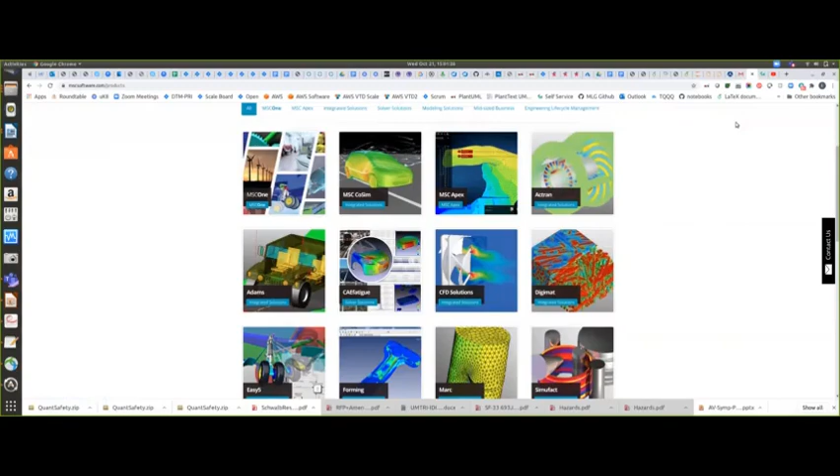The company is a simulation company. You can see here we have quite numerous products, different types of simulations, mechanical engineers and vehicle dynamics, and lots of different types of simulations. The one that I'm talking about here relates to this product. Let me show you the video of what our product is.

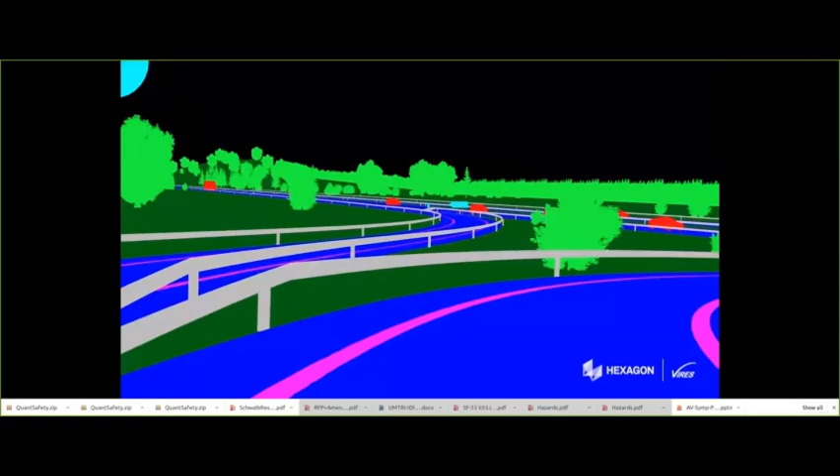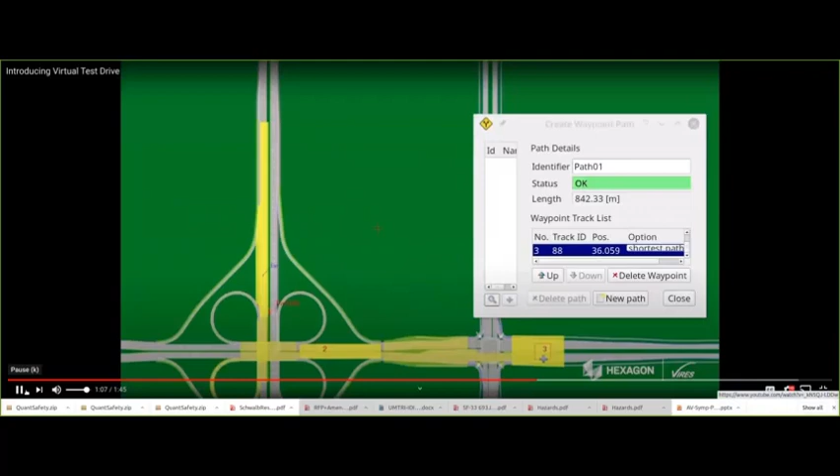I hope you guys can hear. Yeah, able to hear you. Edward? Could you guys hear it? I hope you can see it. If not, I'll move on. Able to see your screen? Okay. Okay, so then I guess I wasn't sure. Could you hear it though? Was the audio playing? Audio not perfectly. No. Okay, that's fine. Okay, so I'll move on to the presentation. Sure.

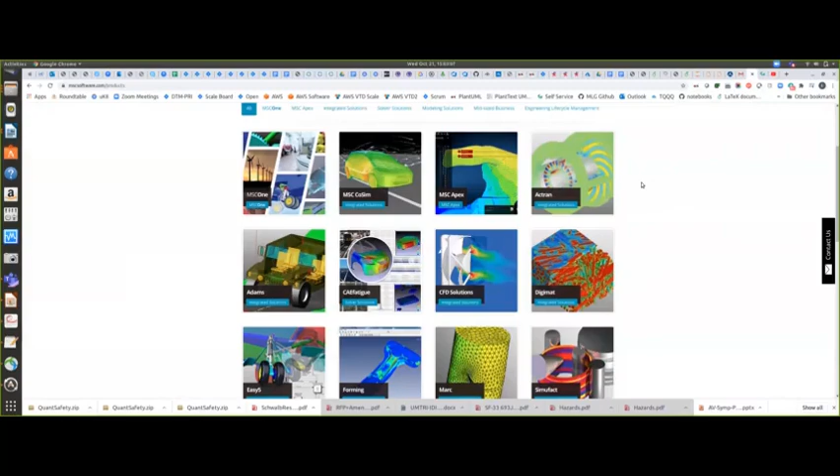So the company MSC Software was acquired by a larger company called Hexagon, and so as part of that we have numerous other products that were added. And so here I'm going to focus specifically on hazard analysis for autonomous vehicles and how do we address this problem. So let's start talking about the scope of the challenge for those not in the industry.

You may or may not know that humans, if you add up all the miles that people drive and divide by the number of fatalities on the road, there's about 90 million miles between fatalities. So we drive 90 million miles for every fatality we observe in the United States. So even though we have 30,000 fatalities, we do have more than 3 trillion miles traveled.

But if you do statistics on a vehicle by vehicle basis, because this is more important, the autonomous driver needs to be as reliable as the number of miles a vehicle travels between fatal crashes, not a driver. And that would be more between 200 and 400 million miles. That's a big number. And so we need to build AI systems that are not 99% accurate, not 99.99% accurate, but 99.99999, many zeros accurate.

And so the implications of that is that autonomous vehicles would have to be driven billions of miles to demonstrate their promised rate of fatalities and injuries. And existing fleets will take dozens of years to drive these miles. And so it means that physical driving alone cannot provide sufficient evidence for demonstrating autonomous vehicle safety.

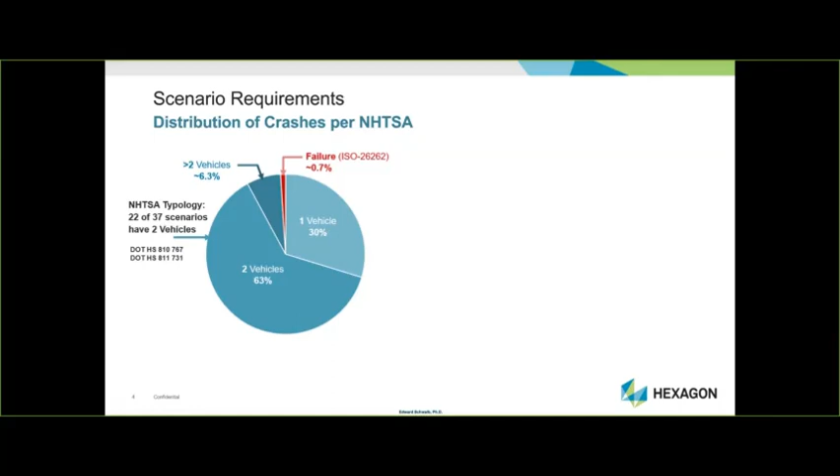But the bottom line is that the safety industry as a whole is only addressing the failure portion, which is less than 1% of the problem. And the remainder is basically behaviors, multi-agent behavior of the different traffic participants.

And so what it means is that when we increase automation, so if you're familiar with SAE levels of automation, level 2 means no automation or limited automation at all. But level 3 and above means that the vehicle starts responding automatically, steering automatically, braking automatically. For example, adaptive cruise control is what we call 2.5. There's some level of automation, but it's very limited. And so that means because we are looking at multi-agent hazards, the scope of residual risk increases more than 100-fold.

And again, yes, I know people like Elon Musk are claiming they will have autonomous vehicles, but be careful what you sign and read the small print, because they relieve themselves of liability. And so in order to make this thing work, please realize that on the road and in simulation, it is very difficult to control individual outcomes. It's impossible to control individual outcomes, mostly because the underlying systems are non-deterministic.

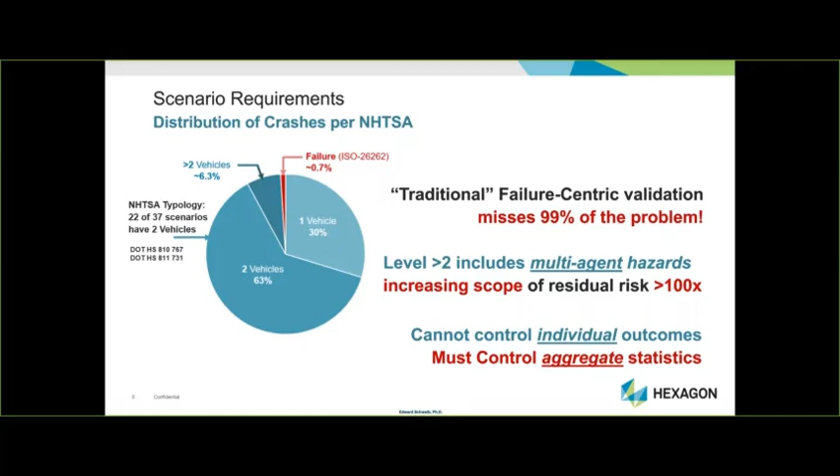For example, robot operating system threading is causing non-determinism issues. But in order to achieve the results, we have to control the aggregate statistics. So this is an example where, when we test something, we cannot guarantee outcomes for a specific scenario, but we have to be able to guarantee the overall statistics. The question is, what is that statistics?

So one of the first things to remember is that statistics is complicated and the problem is complicated. So I'm going to show you 3 examples. I'm going to talk a little bit about some solutions and some experiments that we conducted that you can also conduct to convince yourself that this is the case. This is just informative. We're not selling anything to anybody here.

Just some interesting things. So one of the examples I usually give is in November 2017, an autonomous shuttle was deployed in Las Vegas, and in one of its trips it encountered a semi-trailer truck. The truck was backing up and slowly but surely, eventually it grazed the shuttle. It was getting closer and closer until it grazed, meaning the truck scratched the bumper in the front of the shuttle. So city officials said that the shuttle did what it was supposed to do, and that sensors registered the truck and the shuttle stopped.

And really, is this the requirement? Really what we expect from an autonomous shuttle with passengers in it, that if a truck is backing up into it, it will simply wait for it to get squished? What would happen if the truck would be a few feet further? Passengers said that we had about 20 feet of empty street behind us, and most human drivers would have thrown the car into reverse and used some of that space to get away from the truck, or at least lean on the horn and made our presence harder to miss.

Now, remember, there was no requirement for software engineers to guess what they could ever do when a truck comes and crashes them. And it's very difficult to come up with all possible answers to the situation, but it is required. It seriously is required, and according to NHTSA, more than 3% of the accidents have this pattern. So it's not an edge case, it's a very common case. We're talking about easily 1,000 accidents a year, easily.

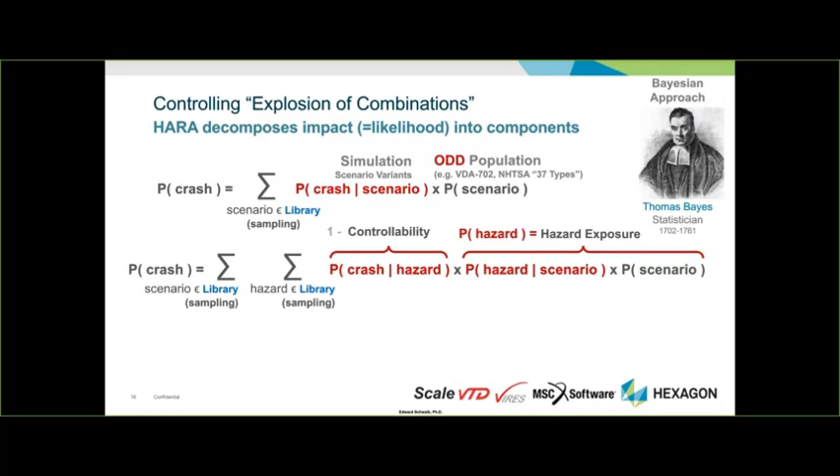How well does the algorithm avoid accidents? So that controllability is the accident avoidance component. And then the probability of a hazard existing for the scenario has to do with exposure. How likely is the pedestrian to be on the freeway? Or how likely is the event of Uber to happen to us?

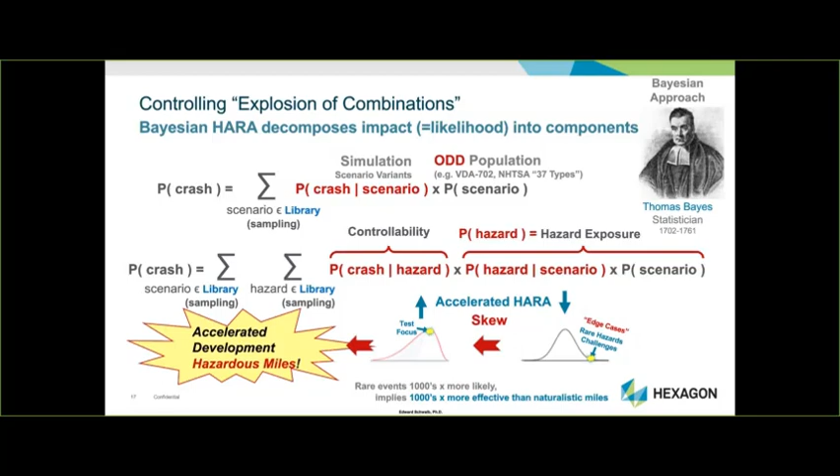And what we do in simulation, we can automatically generate distributions that will increase those probabilities of hazards. So it will learn what the emerging hazard is and will generate, and there's so many different types of hazards that have nothing to do with crashing. So that was one of the examples. I want to show you a quick video.

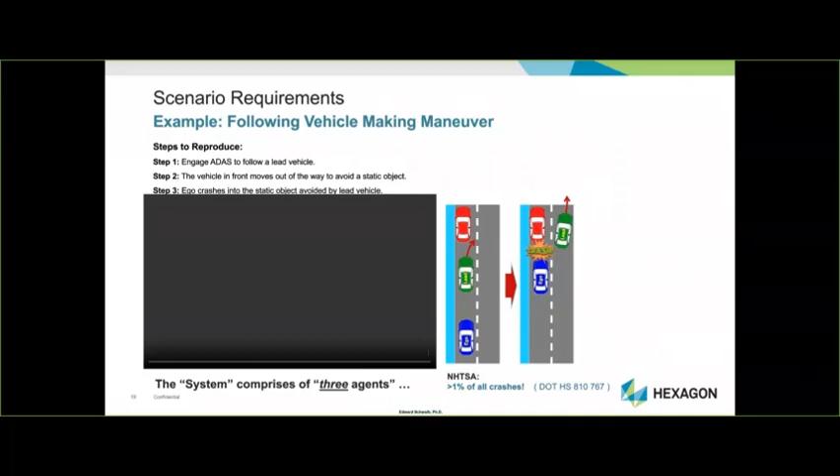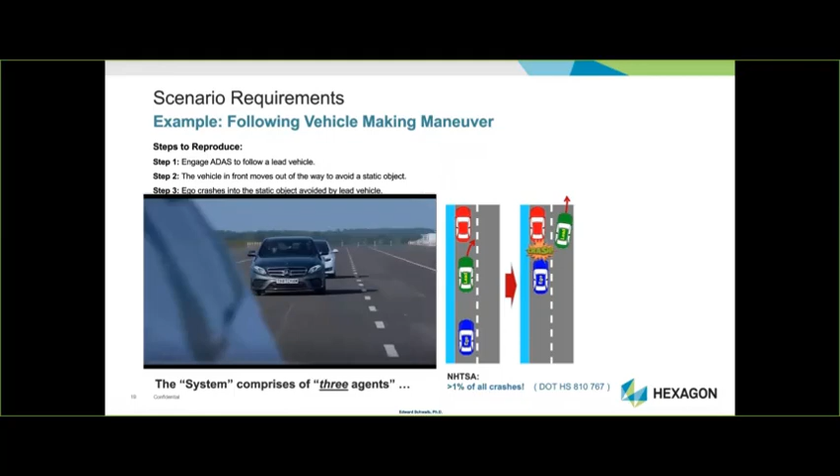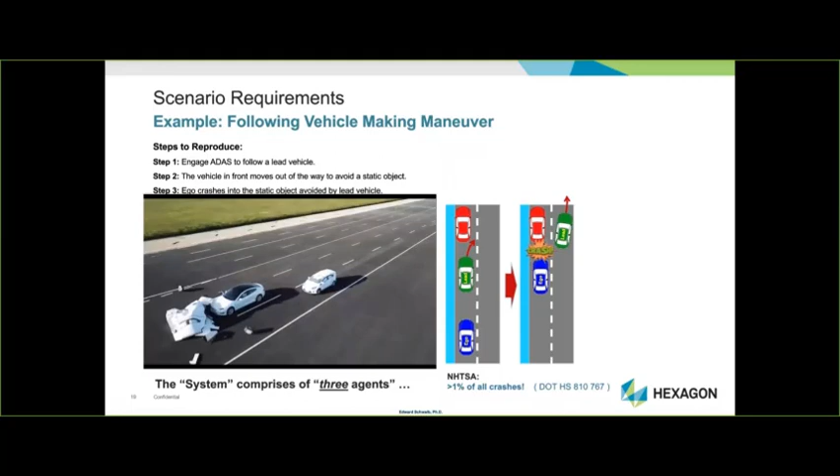So what you see here, this is Tesla, as you can imagine. And what happened is that we're engaging adaptive cruise control. The lead vehicle is moving out of the way and we have a crash. Now, mind you, all the vehicles in the industry have this problem, not just Tesla. We can't even do this, not to mention autonomous. And so this is showing you a very simple challenge. You have to find out exactly what combination of parameters makes the score lower.

Here, the video is not showing for whatever reason, but here we show the exact simulation of that scenario. And I would like to tell you that more than 1% of the crashes are represented by this example. And here are different reasons why the vehicle might be stopped, maybe waiting for pedestrians to cross, or maybe we have a bicycle we're trying to go over, or maybe a pothole or tree on the road and such.

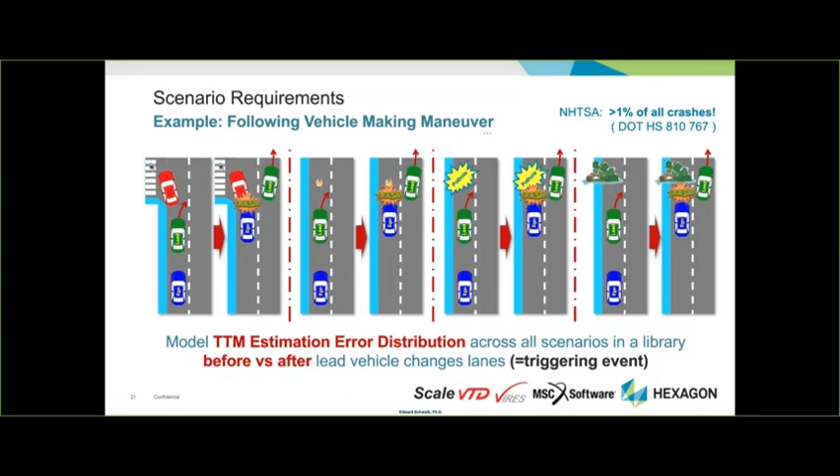And so we need to train the machine learning on those rare events to know what to do. So how do we model? We have to leverage distribution. In one of the experiments that we did, we said, okay, let's train our neural network to detect the distance to the vehicle in front of us and see how it performs. So we trained it on sunny day images and scenarios, and then we tested it on dusk and snow scenarios.

And we found out that the neural network overestimates the distance, says it's higher than it really is when I test it on distributions other than what it was trained on. So I trained on sunny days and I tested on dusk and snow, and we can see the shift. Now this shift is again unsafe because we would brake later than we otherwise would if we hadn't done that test. So the point here is that the accuracy by itself doesn't matter as much.

You would argue the bias here is what matters, but the distribution matters more. So instead of just showing a single number that says this is my accuracy or this is my false positive or negative, no, you need to have a distribution perspective because you want to know how far the distribution is and what would be a safety factor that you need to add in order to make it work.

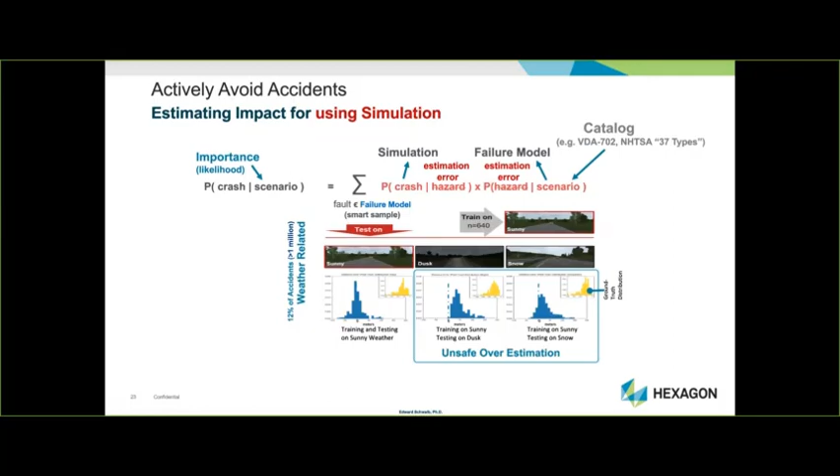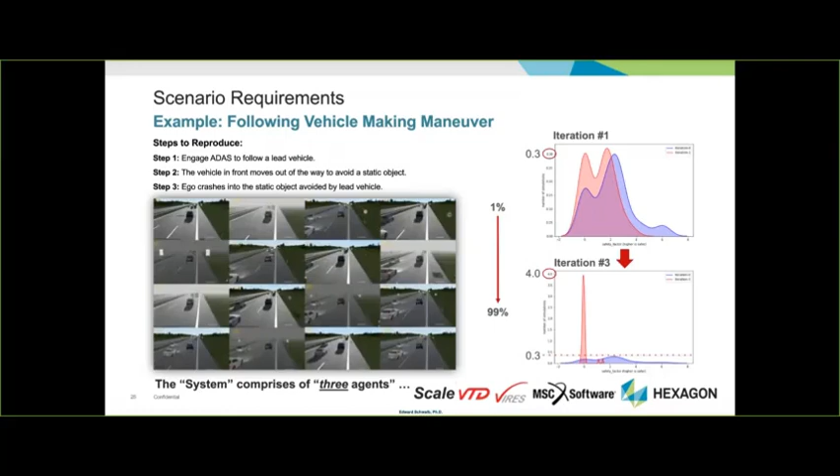But the virtual development and testing using those techniques needs to be first class. So if you just put the vehicle on the road and then you measure what happened, you have no chance. There's just not enough physical combinations to cover all the multi-agent scenarios you need. And you need to work with AI that trains and validates on extremely rare scenarios. So if it looks okay, even 99%, it's terrible. If it is 99.99999% correct, that's good.

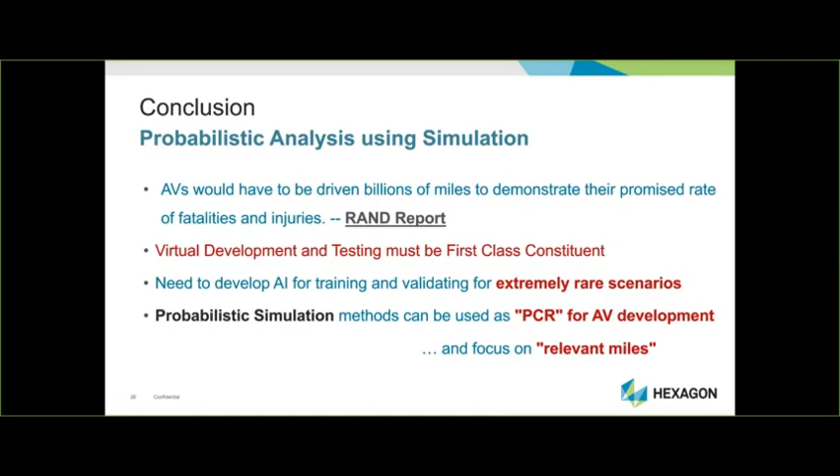And so I guess the message would be that we need to focus on probabilistic simulation of scenarios. We can't just look at individual cases one at a time. So that's pretty much it.